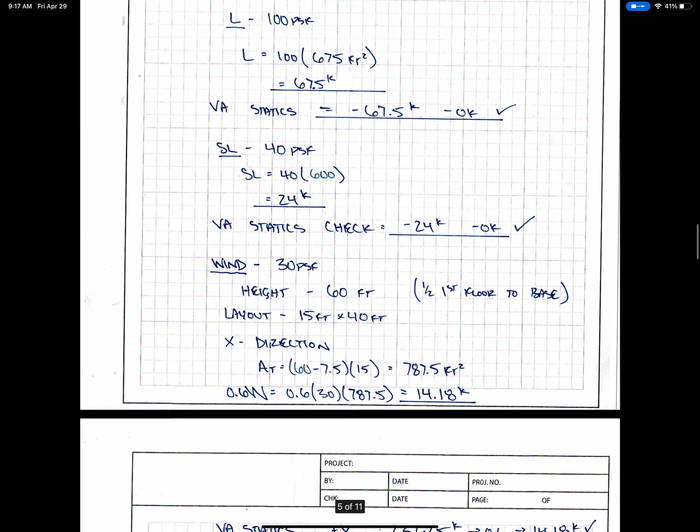I expected in-service level checks.

Wind, second story shear. Why'd you ignore self-weight? Why did I ignore self-weight? Because it was easier to do.

And I could do it, but that wasn't a valid reason to do things. Because I wanted to. From a validation standpoint, do I want to validate that the model can handle the members, like every self-weight? Yeah, there would add some value there. But the chances that they messed that up are probably pretty slim.

The chances are that I messed up putting into the model the right loads to get the overall dead load. That's what I was more worried about. You might have had a wrong member in there. Totally, yeah, and there's an extra validation there, and that's where I get to say, I didn't have to do it, okay?

But some of you did, which is fine, okay? And it'd probably be good. Did anybody find an issue that way though? Or at least not in the calcs. I got docked 2 points for some reason though, even though they managed.

So second story shear due to wind, right? I gave the definition of it because I think it's somewhat misleading in the description, or in the language, but it's really looking at all of the level loads above the level of interest. So if I ask you for the second story shear due to wind, that's essentially all of the loads you were putting on all of the subsequent floors above it, okay?

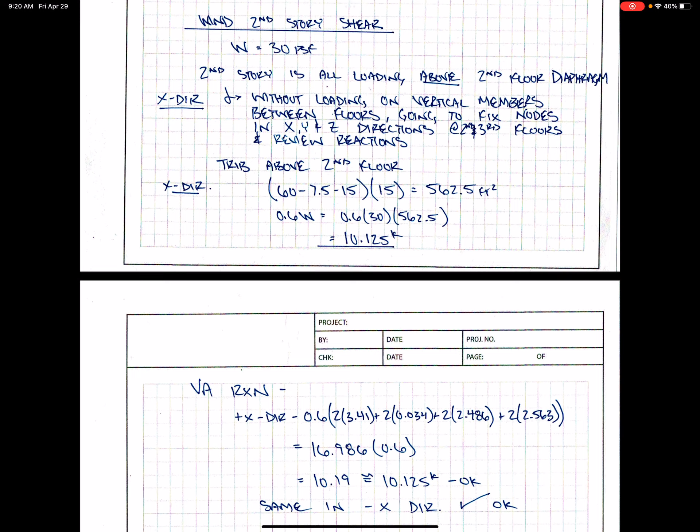And the reason I found that out is because I did pin it that way, and I'm like, what the heck, this should be the same. Then I started thinking about it, like, well, you have this continuous column running through. So then when I did it the second time, I actually looked at the shear within the column. In the longitudinal direction, I just pinned at the second floor and got all my reactions. In the transverse direction, when wind's hitting the broadside of the stair tower, I looked at all of the shear in the columns in that story and added those up, and all of that worked out, okay?

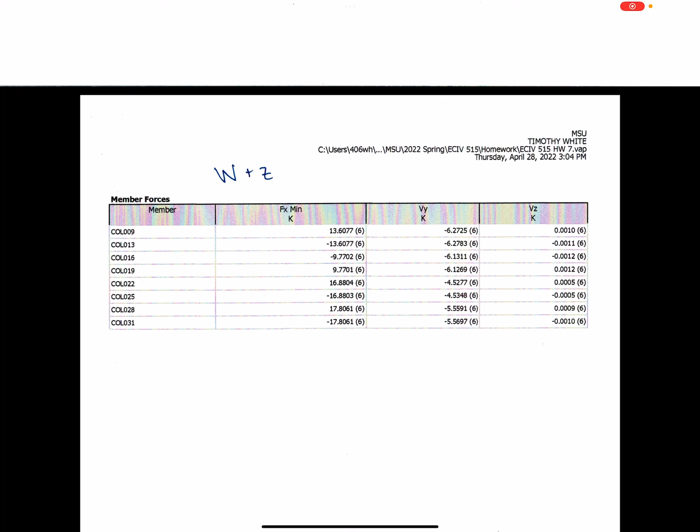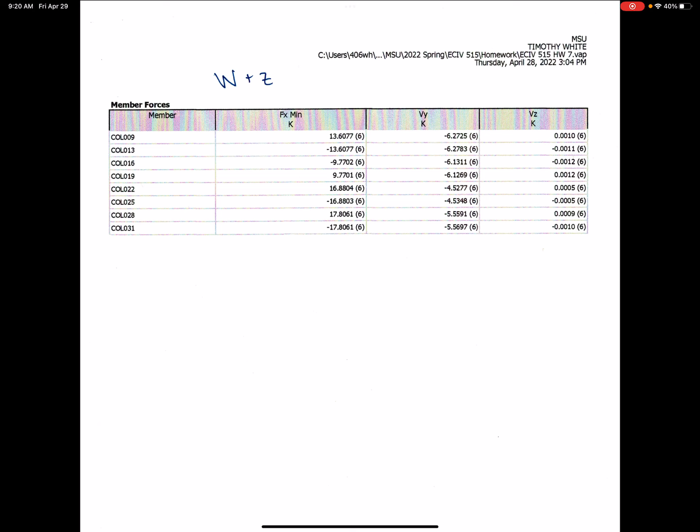Yes, Elias. I'm looking at your story shear calculation. I'm kind of confused where that trib area is coming from. Your hand calc for the story shear: 60 minus 7.5 minus 15.

Isn't it just the 2 stories above? Shouldn't it just be 15 times 30 feet? Yeah, so we had 15, 15, 15, and 15, right?

And I wanted to know what the story shear was at the second floor. I think everybody read that differently. That's the first floor, or like, between the two. This is the first floor, well the first story is— I'm glad you didn't pick that up. It's second story shear, no wait, you guys did it right. Yeah, it's second story shear. When you look at the definition, it is all of the...

So regardless of looking at it this way, if we looked at the entire building, we had loads coming in at all these diaphragms. It's really PSF load, across either along the length if it was wind, or down along each one of these beams if it was seismic. So each one of these was coming in at a level. When you look at story shear, what they ask is what's going on above the diaphragm at that story, everything above that level that is acting at these levels.

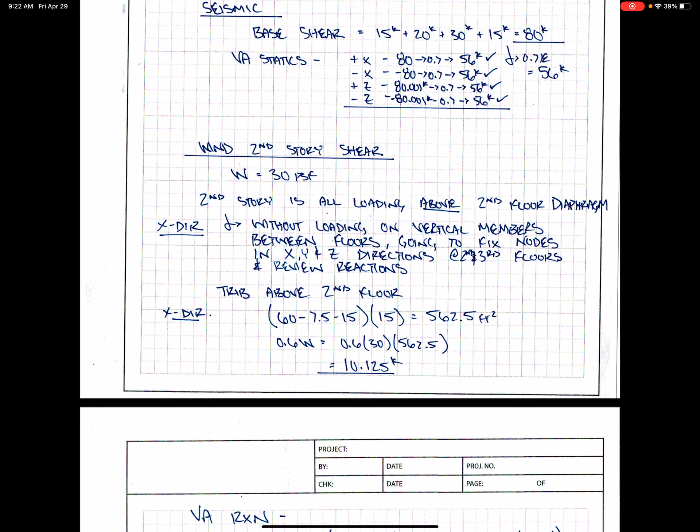So if you looked at the construction of this stair tower - wait, first of all, I think what most people are confused about is I think I did the second floor as the next floor up from where you're looking at right now. No, that's really the first floor. Look at it like this, in your problem statement, when you gave the story shears for the earthquake loads, you go first, second, third, and roof. It's just like, you know, you do the same process, it's not that big a deal.

Yeah, I didn't see that. I would agree that does look like the wrong second floor. So that was second, third, fourth. That's the second floor. I kept going back and forth, I think because I saw this and was like, okay, I'll go with that. Oh shit, yeah sorry, alright, you know this is the second floor. Thank you, Amanda. If you have any gripes about that, come talk to me, okay? If I didn't benefit you, okay, then we can talk about it.

What is the typical way of labeling floors in industry? Do you go ground level, first level, or? Usually ground level is the first floor, so ground and first floor are the same. Is it like ground is the first floor and then the second? Yep. What if you said first level, is that the same? That would be this.

The walls - one thing that was different is some of you took the tributary width from, because when I originally loaded my model, I had trib width to each one of these diaphragms as 15 feet, halfway between story height. But I let go of this. The reason is because generally in construction, looking at this stair tower, there's cold-formed steel studs in the wall that frame from the ground floor to the second floor, first floor to second floor, first elevated diaphragm. Those studs are spanning vertically.

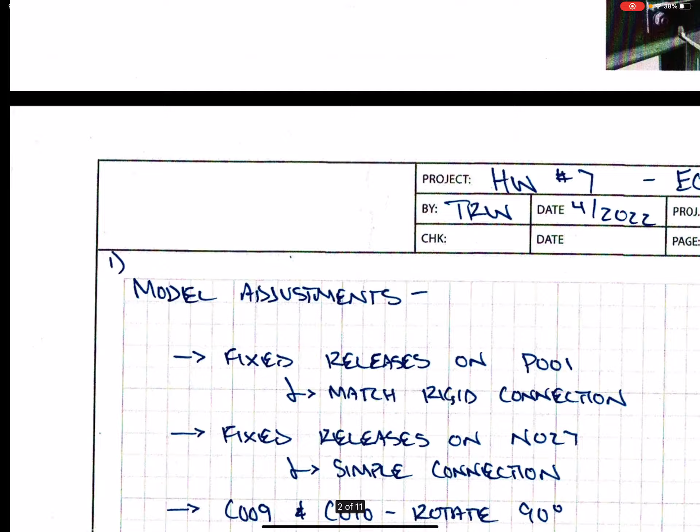Okay, so that's the story shear. But it's of the two stories above that floor, right?

So like if you cut here, you then include the tributary width, or the loads that you would look at are all of the loads on the levels above that level of interest, on the stories above that level of interest.

Yes, and so you don't need to change the tributary area of what's hitting this diaphragm, because it's going to be there. You're just looking at what is going on above this level. You don't have to manipulate the forces at that level. You're just essentially saying, I'm gonna cut my structure and look at what's going on just above that second floor.

Okay, some of you, instead of having this as tributary width, got rid of this and said that it was just what was hitting this. So that portion of that load is still tributary to that diaphragm, so it's considered part of that story shear.

Is that the part which is X'd out? Yes, so it runs up to here and you should have included it. It should have been part of it. But that's not the story level, it's in between those loads. So it's like the load that goes in between those.

I wish I had the definition. That didn't help very much. It was from floor surface to floor surface. Which is opposite of what I thought it was. I thought it was the opposite, that's why I was so confused, that's why I had that comment.

It sounds like you got a little offended. He said it wasn't useless to me. 'Cause I said it's because you were saying, no, I was saying, the way the code reads is like you should take everything from this surface, all the load above this surface, and I'm like, we didn't even load it that way, that's not how the loads span.

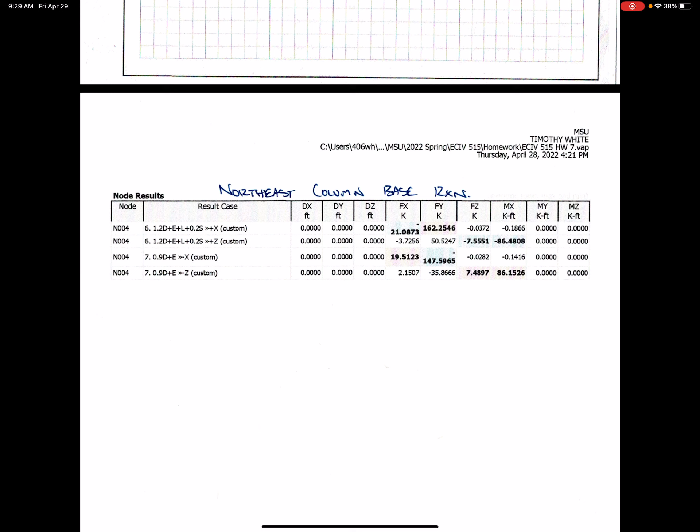So then we checked the final northeast column, which was part of the brace frame, and it was very, very close. I think most of you got it.

If your axial load was a little off, the reason why it was a little off is because you didn't have dead loads. You got rid of the dead loads to check the service case, but then you never put it back on when you checked the overall demands.

I assumed for the longitudinal direction that I could just take the components of the brace forces at that level. Would I lose out on anything? Is there any inherent stiffness that happens at any other nodes?

It depends on your fixity of the columns, right? Because I left the columns continuous from the ground floor, the first floor, all the way up to the roof. So there is some inherent stiffness for those columns to resist bending between floor levels, and so there would be a little bit of shear in those columns that you might not grab.

The braces are significantly stiffer, right? Some of you decided to fix the brace frames in the out-of-plane direction at the ground level too, which would also add stiffness that wouldn't really be there, and you'd have to design for that if you modeled this and used those results.

Because even though the brace frames are super stiff, the second you start pushing on it, there is displacement compatibility in this whole thing, and so when you move that, say, 1 unit of displacement, there's going to be forces at the bottoms of the columns in the weak axis. So what I was really hoping for is you would fix translation, but rotation would only be fixed in the plane of the moment frames. They didn't have to be fixed torsionally either.

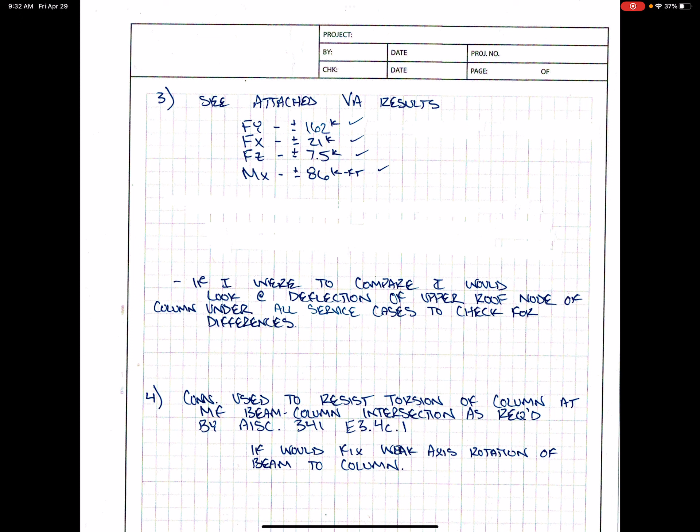So anyway, most of you got this. One big thing some of you forgot was, if you were to have these two models, what would you compare, and where would you compare it? There were all sorts of ideas, and there wasn't a right or wrong answer here. I was just curious about your thought process of what you would look at and why.

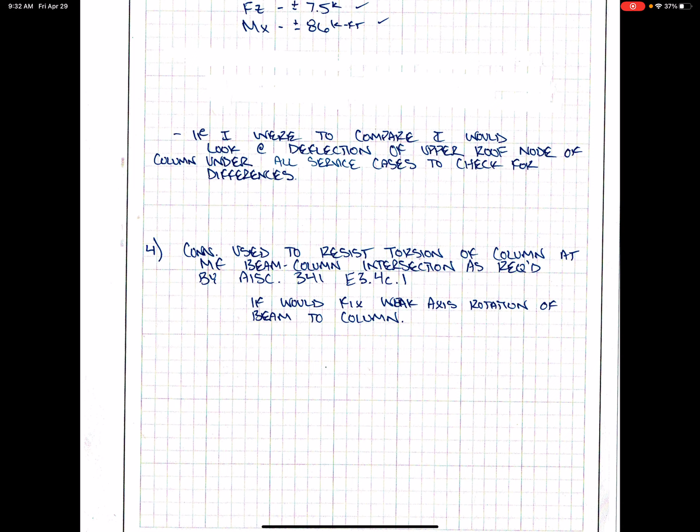Some people said I'd start at loads, some said I'd start at deflections. I'd look at all of the service case deflections at the top columns of this building and see how they compared. The connection used to resist torsion of the column at the moment frame, we talked about that on Wednesday. All right, that's the homework.

Let's do this one really quick.

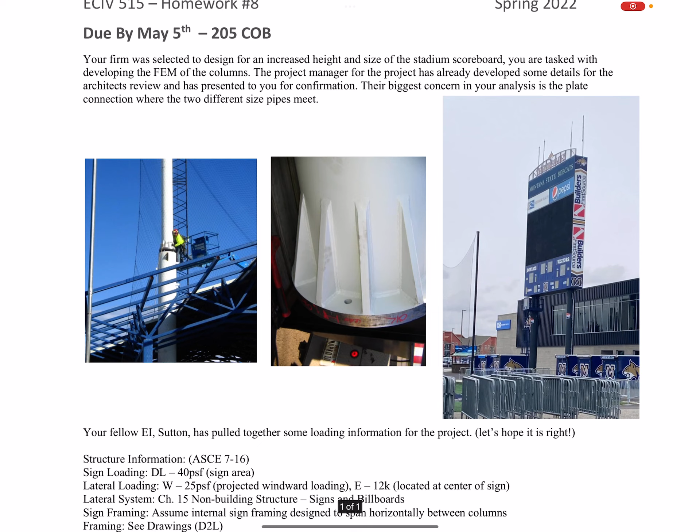I'm fucking jacked about this, all right. So this is the scoreboard at the stadium. I saw it last night and I was like, god damn it, I'm jacked, dude, this is sick. We're gonna talk a little bit about this. He asked me if I did any work on this, and I said, I hope not, it'd fall over.

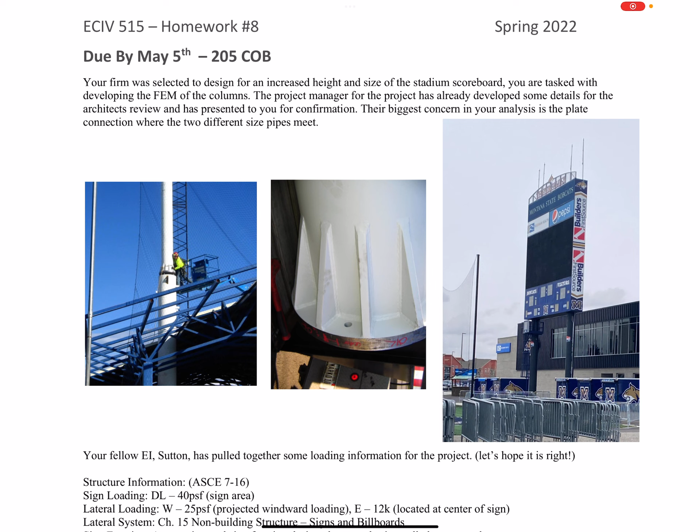This is a Morrison-Maierle project. I don't know about the dirt side of it, maybe TD&H did the dirt side of it. I'm not saying that in a bad way. Some people like the dirt, there's nothing wrong with that, no judgment. I still think they're just way too conservative, but anyway.

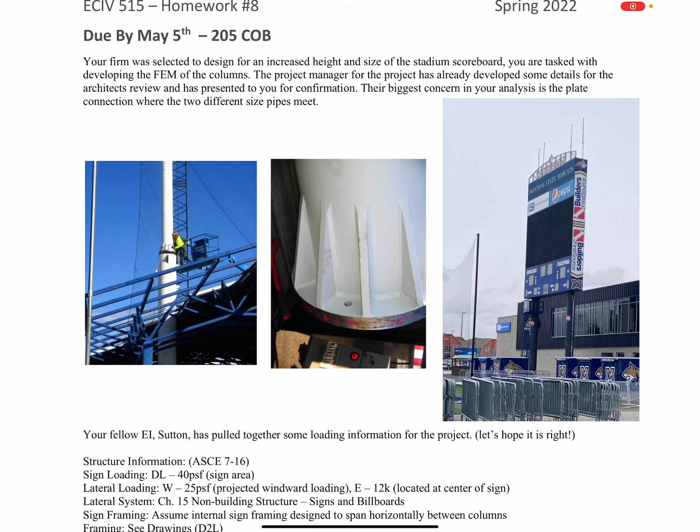Sutton's even in here, he pulled together some loading information for the project, let's hope he's right. We've got ASCE 7-16, we've got the sign loads, the big sign is 40 pounds per square foot of sign area. Lateral loading, we have 25 pounds per square foot of wind load projected on the sign itself. We've got an earthquake load located at the center of the sign, center of mass.

The lateral system, this is a non-building structure. We're not in chapter 12 of the seismic provisions of ASCE 7, we're actually in chapter 15, which allows you to design signs and billboards with their own parameters, and that's what this was designed around. Sign framing: just assume the internal sign framing is designed to span horizontally, so if you have an earthquake load at the center of the sign, imagine there are horizontal elements that allow that load to span horizontally to our pipe columns.

Framing, I'm giving you some drawings out there, we'll walk through those connections, they're also in the drawings, and the layout is in the drawings too. You can ignore the fact that these columns are filled with concrete, and ignore that this thing's sitting on a big concrete mat foundation, and ignore having to design this sign. I think everything's here that you should need.

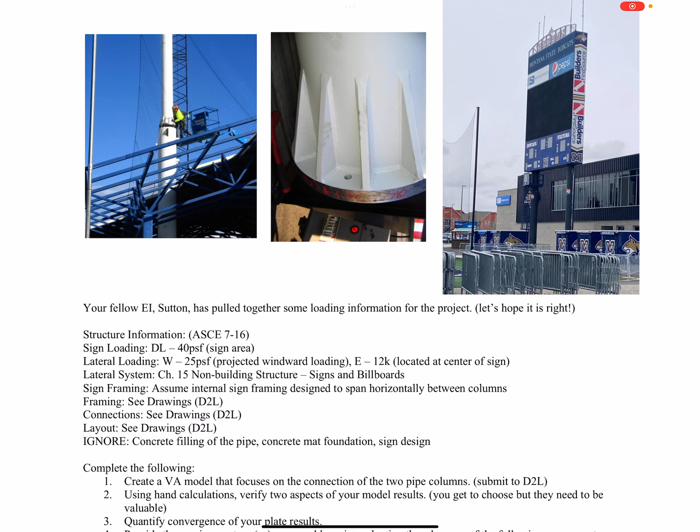So your firm has been selected to increase the height and size of the stadium scoreboard. I don't know if you remember, this scoreboard was a lot different a long time ago. You're tasked with developing the finite element model of the columns. The project manager has already developed some of the details for the architect's review and presented them to you for confirmation. This happens all the time, shit will go out the door because someone has done it a lot. Have you guys seen that?

Or they send a drawing set to you and it says 100% design development, or 20-25% construction documents, CDs. The architect has seen that, you're really in the verification stage. That happens a lot, where stuff gets drawn and pushed out the door a bit, people start seeing it, and then we get to come in and grind through all the numbers and make sure it works. Hopefully if you have a good project manager, they've done this enough that they're pretty close to the right answer right out of the gate, and you don't have to come to them and say we've got to double the size of this column.

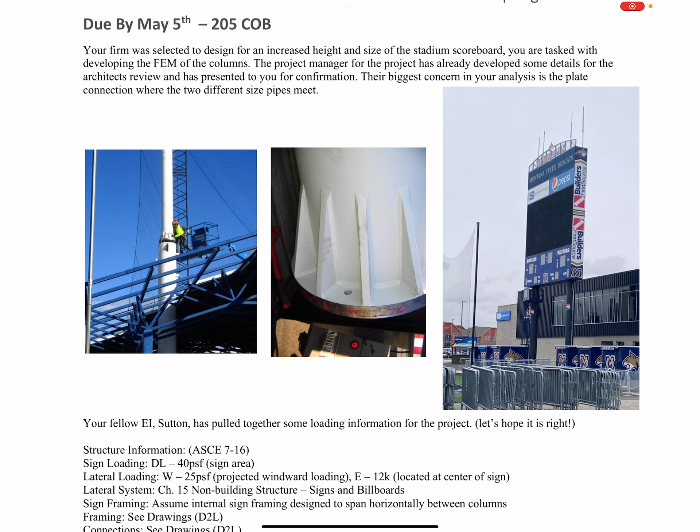And then they have to go back to the client and say that too, right? And they become the bad guy though, and you don't, right?

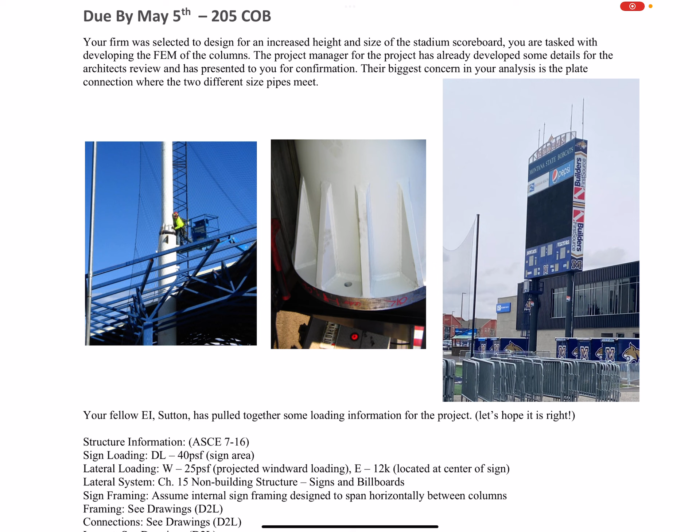So they asked for, their biggest concern for your analysis is the plate connection where the two different size pipes meet, right? So there's a pipe coming down, it lands at this connection at a given height, and it turns into a bigger pipe, okay? We need to model this, okay? This is a picture of that top pipe and what that connection looks like.

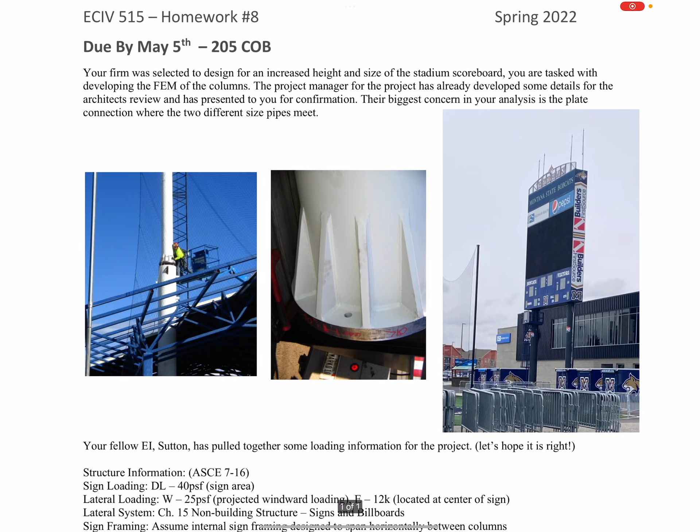If we go through, I want you to create a VA model that focuses on the connection of the two pipe columns, okay? That VA model should have a model description with it, right? Just given, just do that, okay? Just as you've done in all of the last 2 homeworks, okay?

Also, use hand calculations to verify 2 aspects of your model results. You get to choose this time, okay? I'm not gonna ask you to do certain things, okay? I don't wanna get ridiculed on how dumb they are, okay? I want you to come up with your ideas of what you would pick out of your model to verify your model, right? But they need to be valuable, right? Don't just pick the easiest thing out there and run with that, right? Just, you get 2 things to choose, do that well, okay?

I want you to quantify convergence of your plate results, right? You're gonna have some plates in this, and we're gonna talk about it today and on Monday a little bit, about some methods you can use at these interesting interfaces between, say, a member element and a plate element, okay?

Provide the maximum stresses you would use in evaluating the adequacy of the following components, right? Think of your mechanics of materials days, right? You're gonna have a model, it's gonna give you all sorts of results, right? And I want to know what is the maximum stress you would use to evaluate the adequacy, right? Because you're gonna actually have sizes based on the drawing.

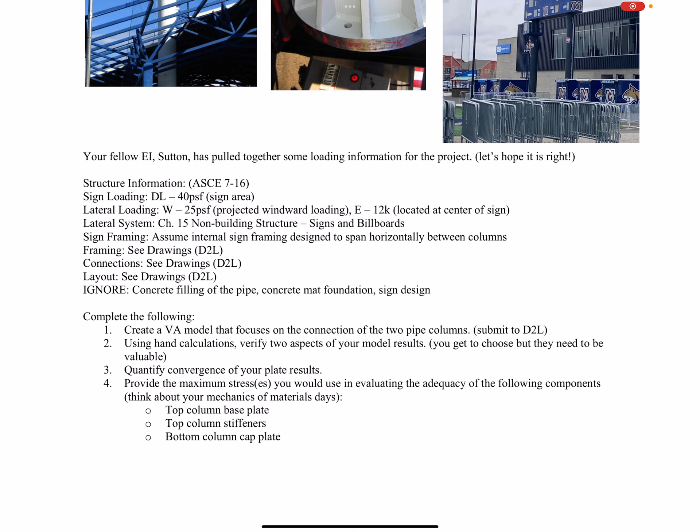So what's the top column base plate? What's a critical stress or stresses that you would be looking at in designing that plate? The top column stiffeners, okay? Those are these vertical elements, right? They're a foot tall that run from the outside edge of the plate all the way up. And then the bottom plate, right? The bottom column cap plate.

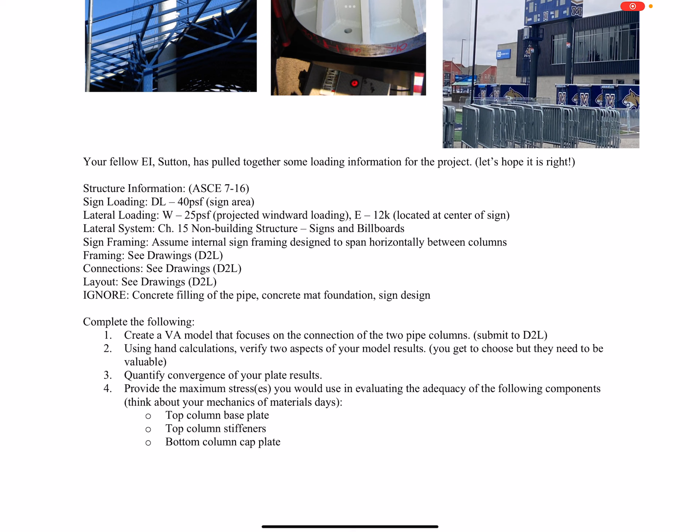Yes. Do you want us to, we're doing like our loading for the actual column. Is it okay to idealize everything as like a point load acting at one point, or do you want it distributed over the height of the sign? You decide, and obviously in your model description, you can make a description of why you maybe made that choice and why or why not, knowing the intent of this and the focus is that connection, why or why not you could make that simplification, right? And how it may or may not affect the connection, right?

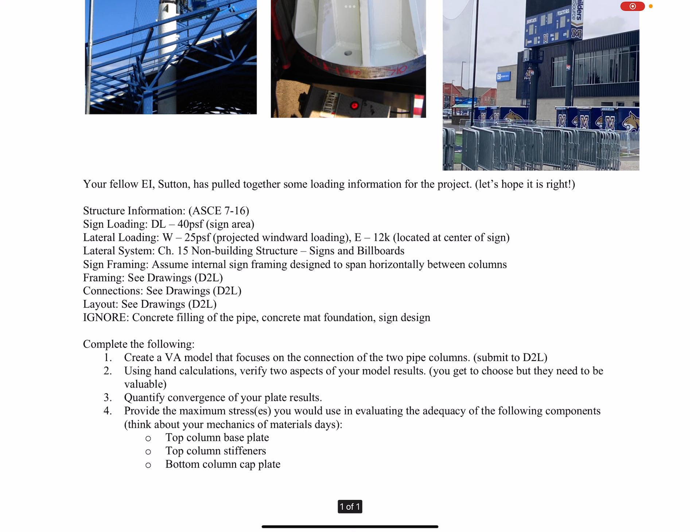'Cause in the end, you want to be as accurate as possible for the connection itself. Is the bottom column cap plate at the base of the whole thing? Is that like the bottom of the bottom? No, so the bottom column cap plate. So we're looking at that large column, and there's a cap plate that sits on the top that this flange plate holds. 2 plates, one on the top, one on the bottom, and that's where I'll show you here, Greg.

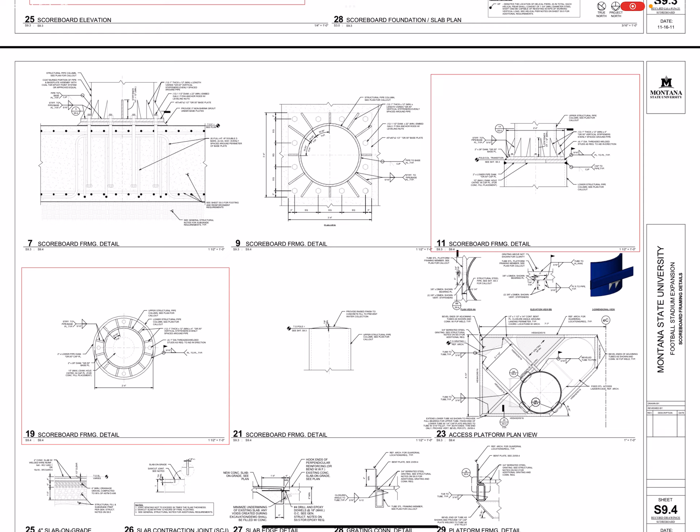These are the drawings, there's 2 sheets, okay? I boxed out the details that are pertinent in red, right? You guys are so well versed in reviewing these, right? These are structural drawings, okay? One that's very important is a scoreboard elevation view, right? This is just looking at the scoreboard.

There used to be, you guys have probably been around, right? This is Revit, baby. There used to be a roof structure under here. There used to be a locker room and stuff, right? They demoed all of this. Now the Bobcat Athletic Complex sits right behind this, okay?

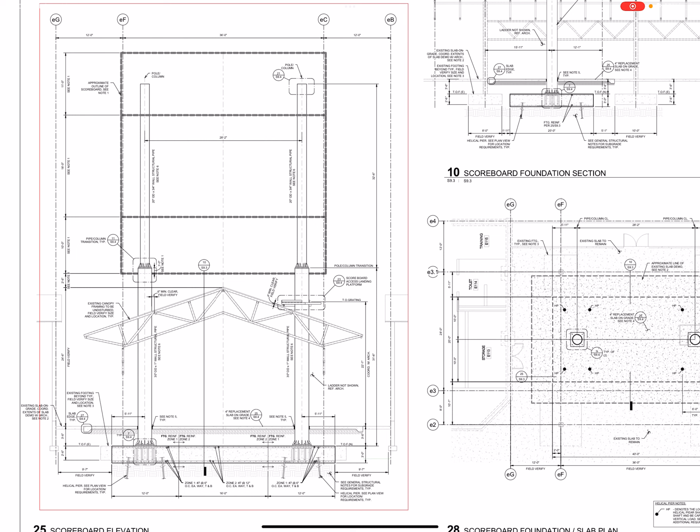This is that connection, right? We have upper column, lower column. They give you the size of the scoreboard, okay? They give you where that scoreboard's sitting, okay? They give you some call outs to details, right? These are little detailed call outs that say, okay, go to 11 on S, I think 9.4 or something like that. So I say 11, here's this connection, right?

Scared? You look so amused. I fucking love this, I would love to do this. I'm excited to see yours and then I'll do it myself, but it's fucking cool.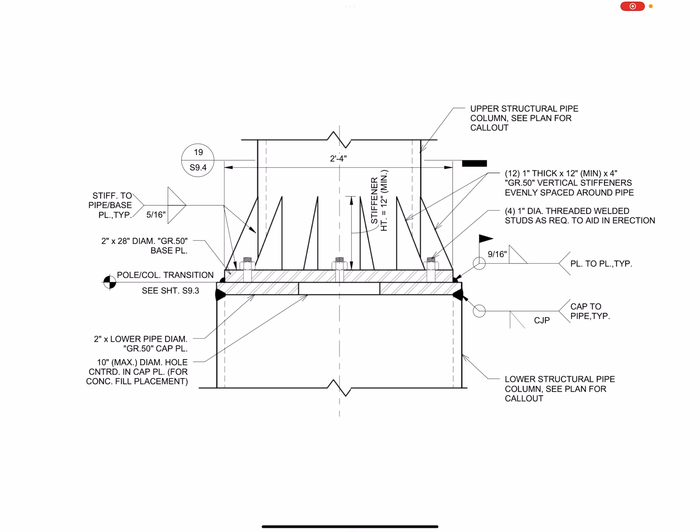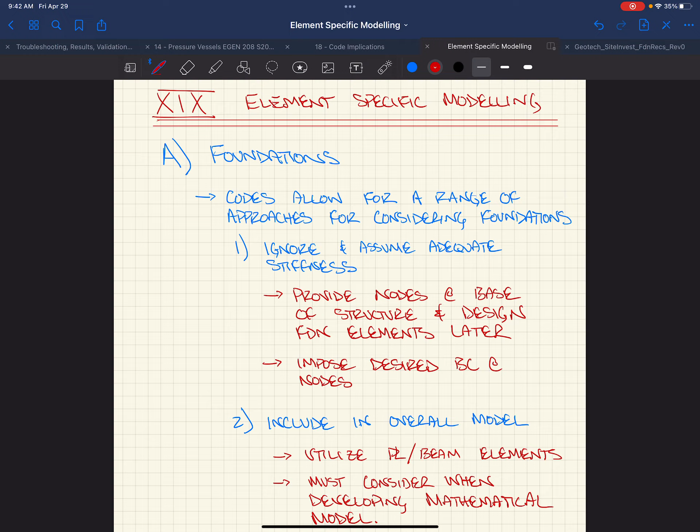Something to think about, maybe we'll just jump into it since we're running out of time. Do you want us to account for the field weld you have on there? No, don't worry about that, just the bolts. So, bolted, and welding there's a final weld on the rest of it? Yes, only worry about the final configuration. What is Aaron talking about?

This little flag right here is a weld callout, a fillet weld. This flag means it's done in the field. In the picture, they picked up the top column with a crane, brought it over, and set it down. There were 4 bolts welded to the top plate to aid in erection, so they could set the top piece down, bolt it, and let go of the crane. Then everything's set up, someone goes up in the man basket and welds it off. So this is the final configuration, the final load path is the weld. You guys can ignore the bolts, just worry about the fact that at the perimeter of this top cap it's welded down to the lower cap. Does that mean all the way around? Yes, that's what that circle symbol means, all the way around.

Did they end up doing 12-inch tall stiffeners? Yep, that's what's up there. Okay, so that's what this looks like.

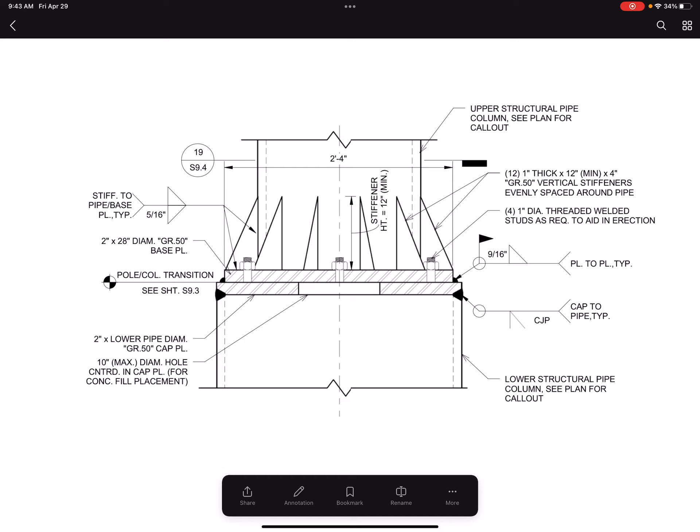Something to think about, and we'll talk about it on Monday, is the fact that we need to consider the interface of members to plates. One big example we'll talk about is foundations. We have a concrete pier that maybe lands on an isolated spread footing. In the model, we're going to model this spread footing with plates. What are we going to model the column out of? Member element. So in the model, it looks something like this.

What the hell's going on? Is there something that might become an issue right here? Huge, highly concentrated point. And how accurate is that in depicting this? Not very accurate, right? It's like assuming this column is coming down and it's just held on by that tiny little piece onto this footing.

So how do we get away from that? Well, we end up using rigid links. Any ideas how we might use rigid links to make that happen? You could offset some nodes from the center and use rigid links into those nodes, using a mesh of rigid links. As we know in FEA, where are elements connected? At nodes. So if we had a spread footing and a column coming down with a single node there, but we know that actual column, maybe it's 18 inches square, coming down here. Instead of having an interface that's just at one individual specific node, we want to make an interface of these plate elements along this perimeter. We want to make it feel like there's an 18 by 18 square column bearing and pulling up and down on this footing. So what can we do?